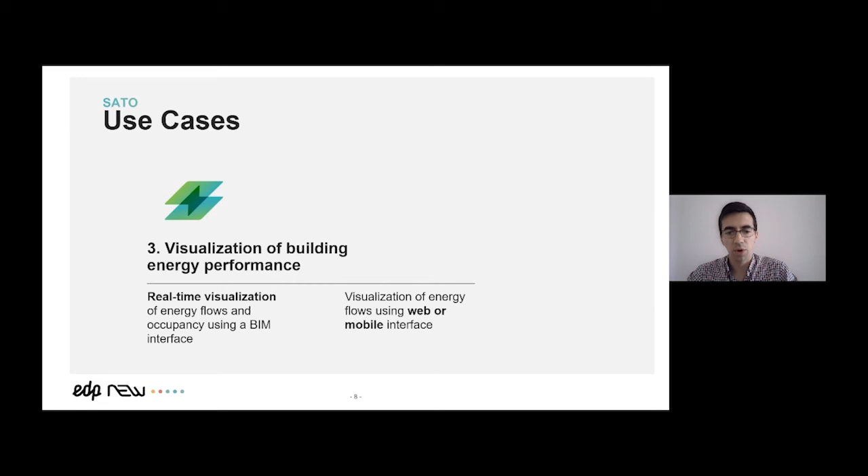Our fourth area is self-optimization. This is probably one of the most complex areas, along with self-assessment. This is where part of the brain of the system works and develops the strategies that will be implemented in the buildings. The main goal, as the name says, is to optimize the energy efficiency of the building, but we also want to improve indoor air quality and occupant comfort.

When we look into this area, we look into more specific and detailed strategies. Some examples can be providing flexibility services to the grid, which is not a short-term thing we can accomplish but a study we will make. We can also look into other strategies such as load shifting by controlling some loads that have flexibility, using natural ventilation, and using techniques of building as a battery.

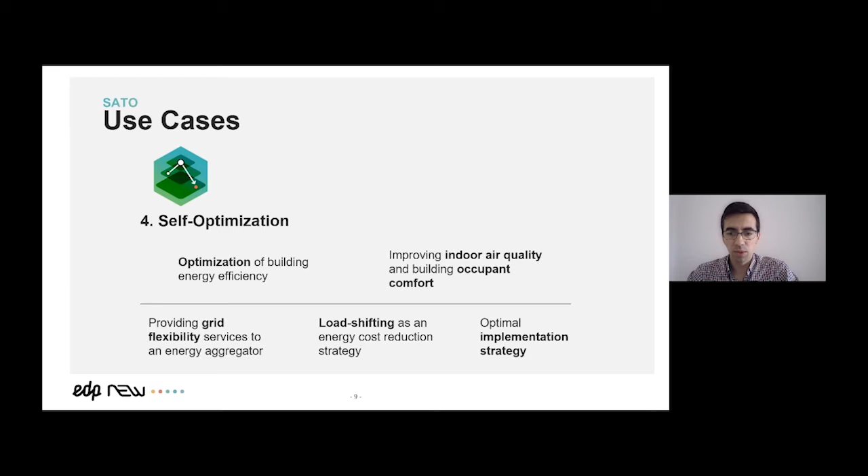At the end, all these defined techniques and strategies will merge onto a system that will evaluate them based on preset rules and decide what's the optimal strategy to implement. Finally, the last area in the project is controlling, which is just implementing the strategy that was decided previously in the buildings using the actuators.

Before finishing my presentation, I'd like to show you two more things. One is where we will test these features, and I'll just highlight the Seixal residential pilot, because it's the pilot that us, EDP, will be most active on. This is very important - we'll deploy ready systems in these pilots and test all these features.

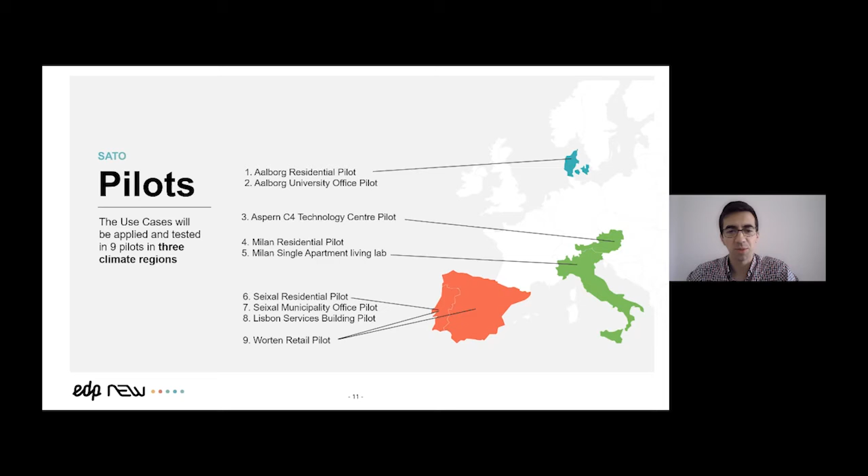Also, if you live in Seixal, I'll leave you the invitation to contact us, because we might be interested in working with you.

Finally, the last thing I want to share with you is just three points on what's in it for EDP, what we aim to achieve with this project. So obviously, we are co-developing this decision-making layer that can be applied over legacy monitoring systems. We aim that by the end of the project, we can develop new services that can be provided to residential and commercial customers regarding this intelligent and smart buildings area.

Also, we are gaining some knowledge on the indoor environmental quality and the parameters we need to assess and monitor to improve user comfort. Finally, I'll highlight the evaluation of the appliance flexibility potential. Like I said, this is more a feasibility study that will gather loads from the different buildings and see if in a future market there would be room to play with this flexibility.

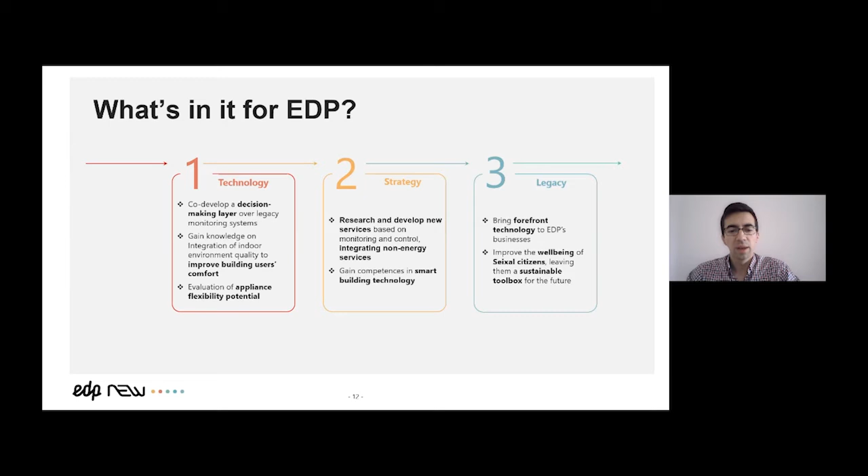Thank you, Flip. We'll now move on to another presentation from Pedro Ferreira, which will focus on machine learning for building energy assessments. This presentation will also touch a bit on the methods being applied to SATO, since Pedro is also working on this topic, as I mentioned previously. So the word to you, Pedro.

Pedro, we can't hear you. I was muted, I always forget. Is it okay now, can you hear? Yeah, okay now? Yeah. Because on my screen it still shows as I'm muted, as if I was muted. Anyway, if you can hear me, then it's fine. Do you see the screen, the first slide of the presentation? I shared the screen, I hope it shows well.

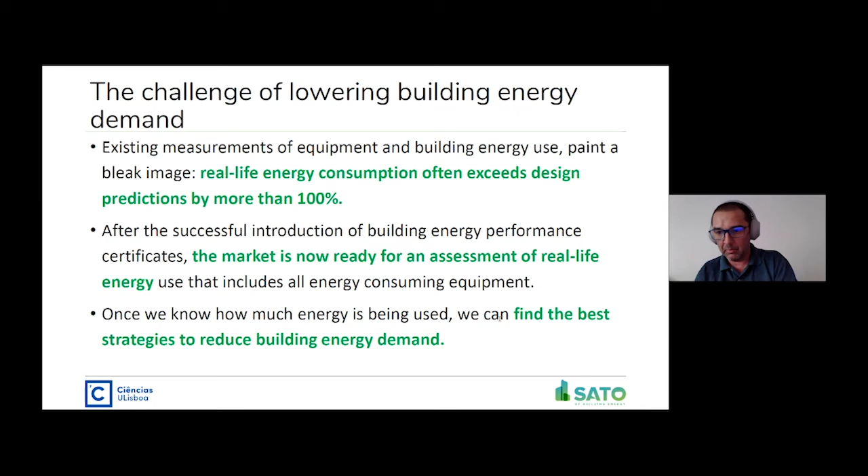So the goal in the project is to provide the means to assess energy and then optimize energy use - it's assess for optimization. Now, what is the potential of machine learning to achieve this objective, both in the assessment part as well as in the optimization part?

Where does this potential come from? Of course, the energy transition process brings digitalization to the energy sector. It also brought decentralization, both in terms of energy resources providers, business models, and data sources.

Importantly, it involved different users and stakeholders and connected them. This means that through this process, we now have an abundance of data related to energy and energy in buildings. And of course, we have new problems and higher complexity problems.

This is why machine learning can give an important contribution for the assessment and optimization of energy in buildings. Because we have different problems with all this decentralization, with the involvement of different users and stakeholders, and with important goals that the European Union has in this respect. And of course, these problems are more complex than they were in the past because of all the relations between them.

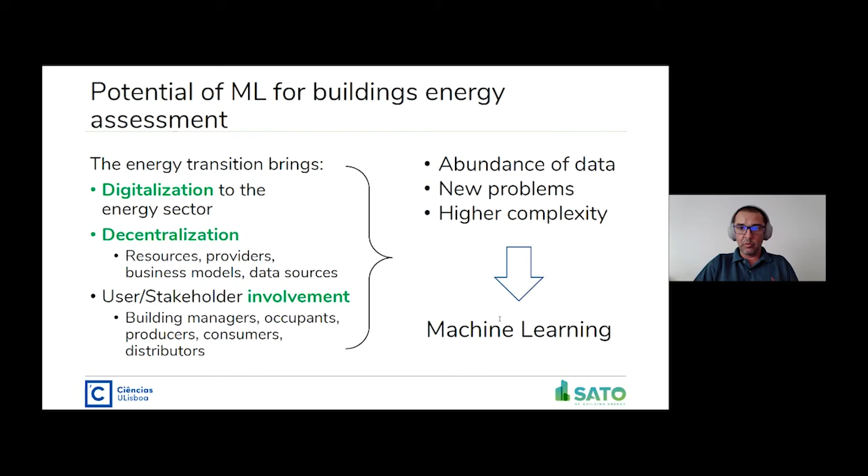We need just a small note, because machine learning is not alone in this process, and it's only possible to use it for this objective mainly because of two other components: the Internet of Things and cloud computing. Internet of Things brings us connectivity so that we can connect all the devices and equipment in the building, sensors, technical building equipment, everything that is consuming energy. Potentially, we can connect it to a network.

And then we can have data flowing from these devices to a cloud. That's where cloud computing comes in, because it can centralize data for a building zone, so we can structure our data in many different ways. And it has the potential to provide us algorithms as a service, so we have machine learning algorithms already streamlined in a way that is very easy to connect them to datasets and extract relevant information from them.

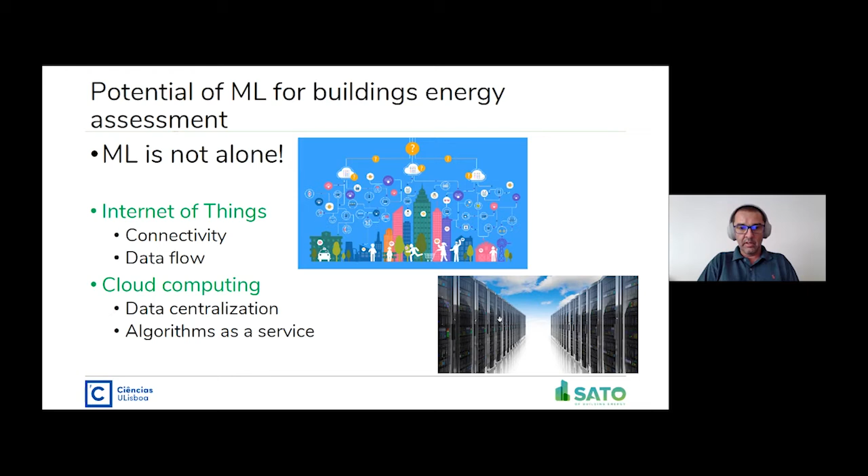And the way that we do this integration and build the systems that are going to assess and optimize the energy in buildings, we need to remember that we are building systems for humans. And the purpose of using machine learning in these systems is because we have so much data.

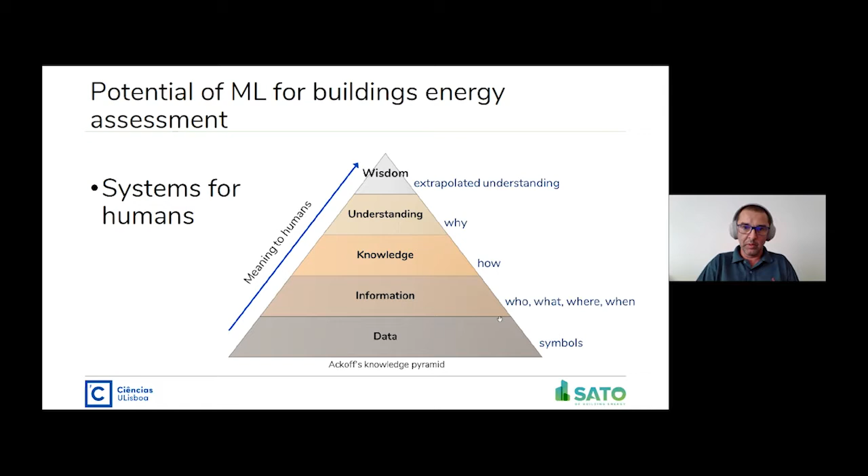So which kind of applications can machine learning have in the context of buildings? Well, it can be used for monitoring and assessing energy, both the consumption and load disaggregation, so that you can find out how the energy is being used by different consuming devices. It can be used for prediction, and prediction can be of consumption and of other factors affecting consumption, such as the weather, such as the occupancy of the building, all factors related to the way we consume energy.

You have to know that energy assessment is not just making or having measurements of energy consumption in devices in buildings and displaying these measurements. We need to go beyond that so that we can assess the performance of those devices and the performance of the buildings. And to do that, we need models, we need different processing capabilities.

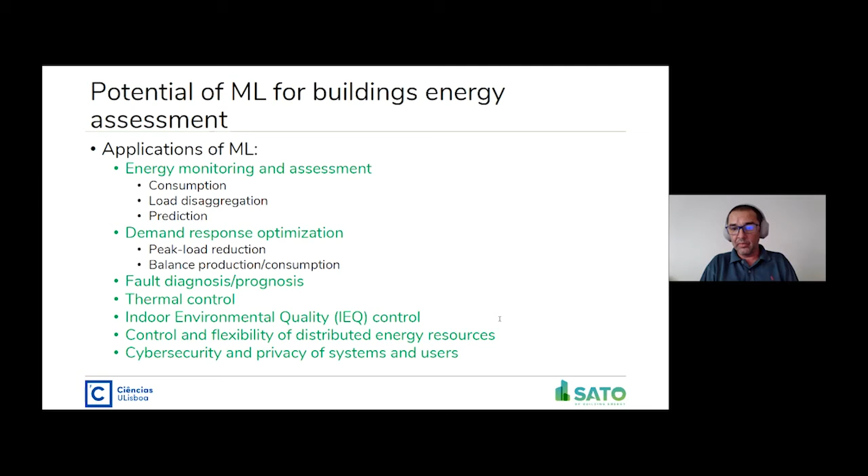But coming back to these applications, you have demand response optimization, fault diagnosis, thermal control or thermal comfort control, indoor environmental quality control. It can also include thermal control there, also with air quality and lighting control, which are three domains, at least these three of IEQ. Control and flexibility of distributed energy resources, and of course, importantly, because this involves the occupants, the owners, the users of the buildings, we need to have cybersecurity and privacy, and machine learning here also has important roles to fulfill.

What is the general approach that we have for machine learning based buildings energy assessment? Well, first let's define self-assessment, which is the concept that we use in the project. We define it as the capability of a building energy system or equipment to self-diagnose their energy performance.

So what we build is we have the device and we have data measured from the device and the environment in which the device is operating. And we create a virtual device in the cloud that becomes the self of that device, and it can assess itself and optimize itself. This is the principle behind our project.

So we envision machine learning based self-assessment of buildings energy performance, and we see it operating in two ways, related to how we use data. We can use it in a passive way, or use it in an active way of generating data for the assessment.

Passive usage of data is just having lots of sensors and devices that use energy transmitting information to the cloud. Data is continuously generated, stored, and processed, analyzed. We also have a definition of what to expect from those devices and buildings—benchmarks, performance thresholds to compare our assessments to, so we can find out if the performance is good or bad. We need these references. This is the first two points in the passive usage of data.

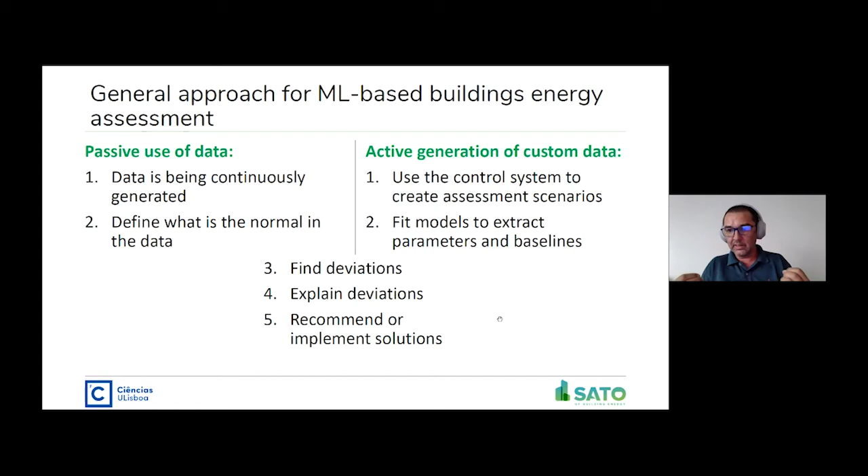Whether it comes from the passive way, just measuring and analyzing, or from data we actively generated using the building and its devices, we then try to find deviations and explain these deviations in the performance of the equipment or building. This path from data to explanations and finding deviations is the main role of machine learning here, because you have too much data and you have to summarize it into useful information so that automated systems or humans can make informed, high quality decisions on how to manage the energy in the building.

In these self-assessments, we are going to project and analyze them at different scales: space, time, occupancy of the building, and also autonomy. Autonomy is the way we assess how management services operate—are they fully automated or completely manual? We can project the assessments on all these scales.

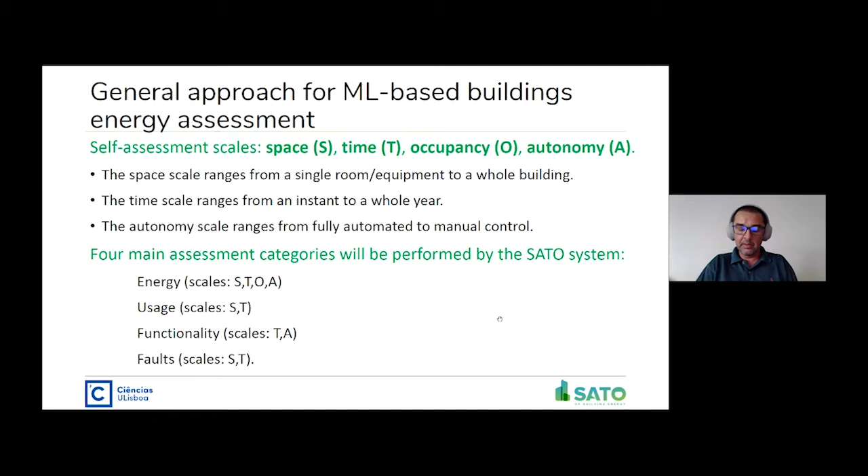There are four main assessment categories that we are going to perform in the project: energy related assessments, usage related assessments related to the way we use energy, functionality assessments, and fault assessment in the equipment that we have there.

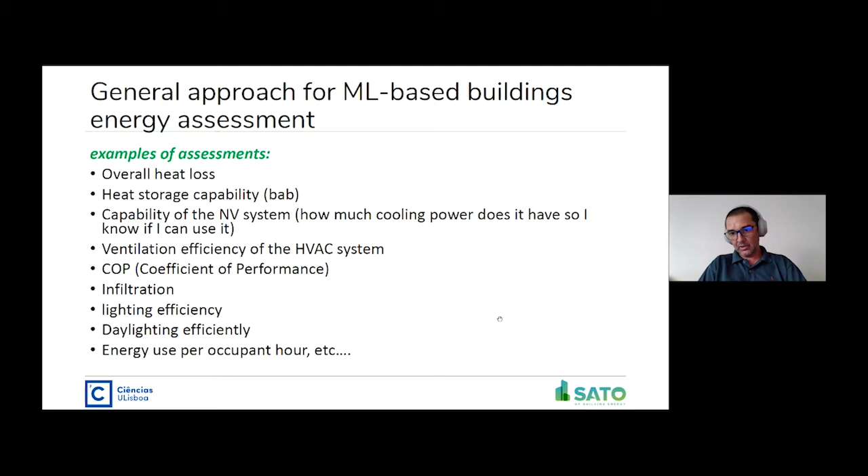This is a list of examples of assessments that we can do on the building. I'm not going to go through all of them. Maybe people in the energy field already recognize some here, but there are many other assessments we can do, provided we have the right data for that.

I think I'm going to finish now with just two or three more slides, just to talk a bit about the main types of problems and the challenges that machine learning-based buildings energy assessment face. So, what are the main problems in this context?

Well, they can be categorized into modeling and simulation problems, control problems, or optimization problems. For modeling and simulation, we use machine learning techniques to perform system simulation, to make predictive models for weather, consumption, occupancy of the building—different kinds of models that generate predictions of performance indicators or forecasts of quantities over time. Classification is also an important technique we use here.

These can also be used for control, and the model predictive approach is central, considered the most effective way to use data and assessments to find an optimal way to manage different devices in the building. And of course, optimization—machine learning based optimization methods can take complex problems with high dimensional data. These are usually called meta-heuristics, because they can handle problems that classical optimization methods would struggle to solve.

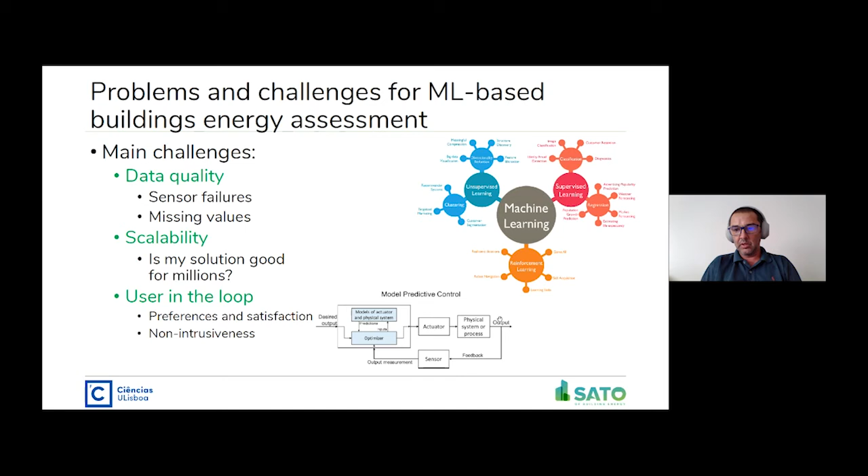Main challenges, and this is an important point—I think this is not the last slide, but the previous one. I'm not sure if I'm taking too much time already. It would be good to conclude, Pedro. All right, so I will.

People usually have high hopes for artificial intelligence and machine learning, but they forget it's very difficult to make these systems operate correctly in practice. Why? Because it's difficult to maintain data quality and data dependability, related to data availability, reliability, integrity and so on. It's common to have sensor failures and missing values, and we need methods that operate well when these problems occur, and that's not common.

In academia, we have data that is very well curated, well processed and stored, and we build very good methods that operate well on that data. But commonly in a real scenario this will not be the case, and we have to be able to cope with sensor failures, device failures, missing values and so on.

Then there is scalability. Is my method, my solution, good to be scaled to millions or many thousands? Is it scalable? If it's not scalable, then there's no point in developing it.

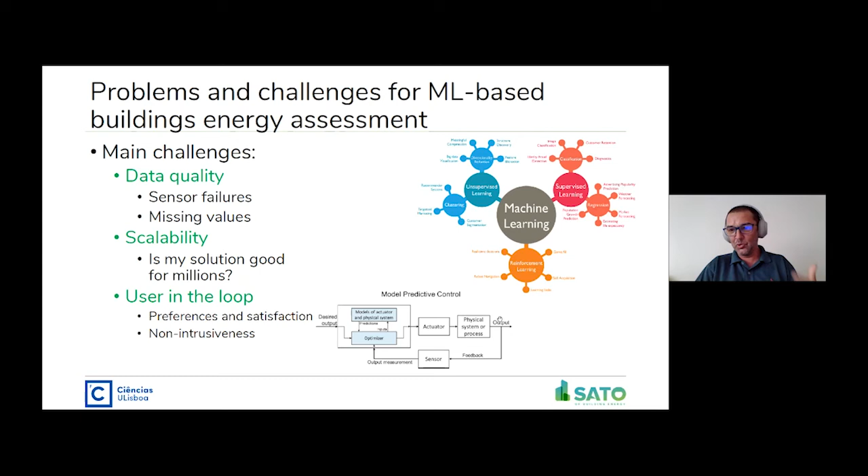And then there is the user. The user has the potential to mess up things a lot if your system is not well designed. The difficulties have to do with how to catch the preferences of the users and how to maintain their satisfaction with the operation of the system. This second part is a real challenge. And of course we need systems that are non-intrusive. We don't want to be nudging the users all the time, bothering them all the time. It needs to be done with parsimony.

I think this is, for me, the big challenge that we have: how can I use machine learning, statistical learning, artificial intelligence, call it whatever you want? The problem is that all these different systems exist in buildings. You want to manage demand response, flexibility, indoor environmental quality, thermal comfort, lighting, air quality. You might need to ventilate. You want good energy efficiency. You want electrical vehicles also using energy. You have PV production in your building. How do you manage all this? Because some of these objectives, looking at each one individually, might be conflicting with each other at a certain point in time. Then how do you optimize and manage these systems?

I just want to give an example of artificial intelligence agents based on a technique called reinforcement learning and deep learning models, artificial neural networks, used to develop agents that just by looking at the pixels of the screen of classical arcade games—very complex games, very difficult to win—managed to win and beat the records of these games after some time, after learning. These are very complex problems. So if this can be done in this area, I'm sure we can also use these techniques, or similar ones, to provide an acceptable machine learning based system that can manage the energy resources of a building in a holistic way that satisfies the requirements of the involved stakeholders.

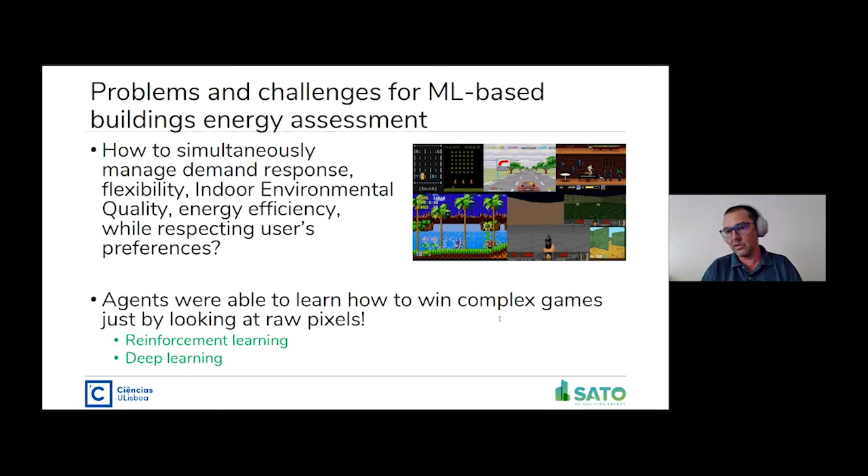And that's it, thank you for listening. I will be happy to take your questions as soon as the time comes. Thank you very much, thank you Pedro.

It was a nice explanation of how building self-assessment and energy assessment is important. Now we'll move to Manuel Casquiço and the presentation about public administration retrofit plans and the current reality in Portugal.

Because I have the sound. No, it's okay, no it's not. Okay. Is it okay now? Yeah, now it's perfect. Sorry for this.

Thank you very much. I'd like to thank EDP New for the invitation for us, for ADENE, to be here and talk about some projects on public administration buildings. I will talk about three different Simplex measures that we are implementing at ADENE. Simplex is a wider program of simplifying processes in public administration in Portugal, and we have funding support for implementing these schemes. The first project is the ECO.AP process, part of the wider program of energy efficiency resources in public administration.

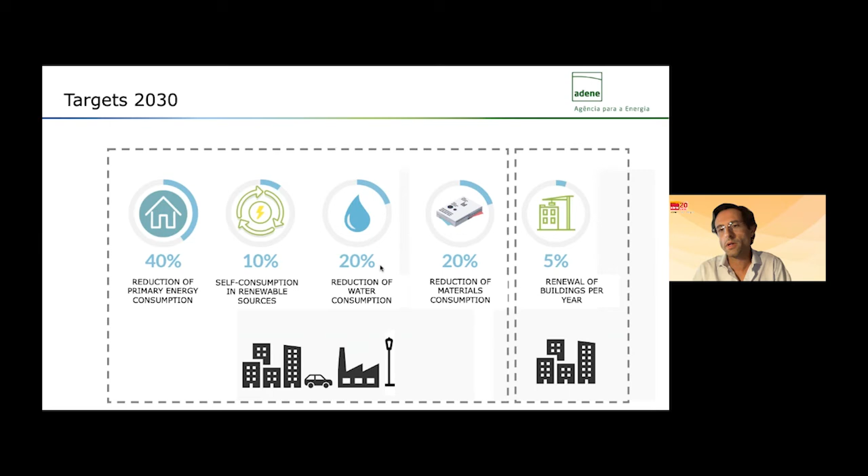So the importance of this program is that it brings targets for the public entities. We have here 5 different targets for public entities: 40% reduction of primary energy consumption, 10% self-consumption in renewable sources, 20% reduction of water consumption, 20% reduction of materials consumption, and finally, a rate for refurbishment for public buildings. So it's very important, and these are the targets that all the entities must have when they are making their plans. I will explain later how.

So this is some numbers just for you to know the universe that we are talking about. In Portugal, we have 19 governmental areas. Each area has an energy and resource coordinator that is our focal point for the ECO.AP program. We talk to them and we send them reports about this program for them to check how the evolution is going in the governmental area.

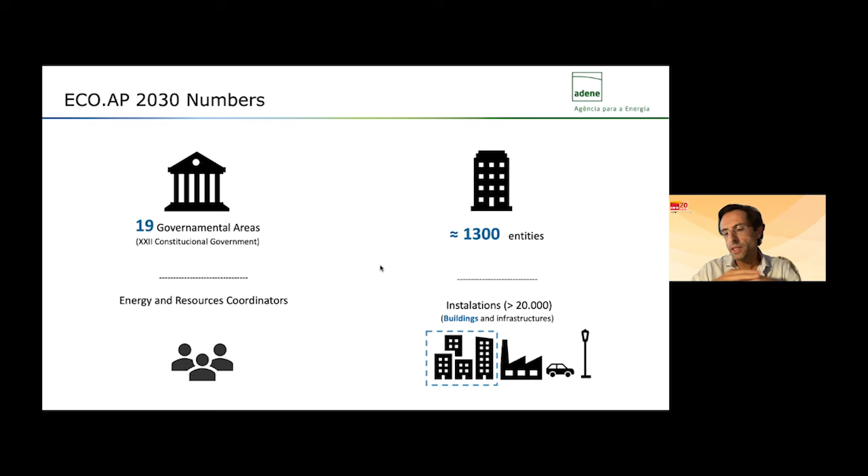We have more than 1,300 entities. This is the approximate number, and we are talking about 20,000 buildings and infrastructures of the different types of governmental areas, defense, education. So it's a wider program that brings together different types of buildings, and that is one of the challenges of the program. So we have here several activities that we are doing at our department.

So the first one is the barometer ECO.AP. It's an online tool that each entity has access to, to control all aspects of their buildings, and they can go there to check electricity, natural gas, and all the information, and they can control all data there.

So the other one is the ECO.AP web. It's a one-stop shop that we are doing for public administration. The first one, the barometer, is already in force. The second one, the web ECO.AP, we are developing at this moment.

Another important aspect is the efficiency plans, as I said before. Each entity must develop an efficiency plan until the end of this year. So we are helping these entities, all the public entities, more than 1,000 entities, to try to develop their efficiency plans that will help them support the financial scheme of the ECO.AP program. So we are hoping that in the next 2 months, I think this month, we are going to have a financing scheme with the European funds to implement the energy efficiency measures for the public administration. It's a specific scheme for the public administration, and ECO.AP is an important part because we are giving support to these entities.

Another activity that we are doing is training activities. During the year, we have several training activities that we are doing to support all these entities. We are also making dissemination because we want to be a good example, a role model for service buildings, for public buildings. You can check our LinkedIn account.

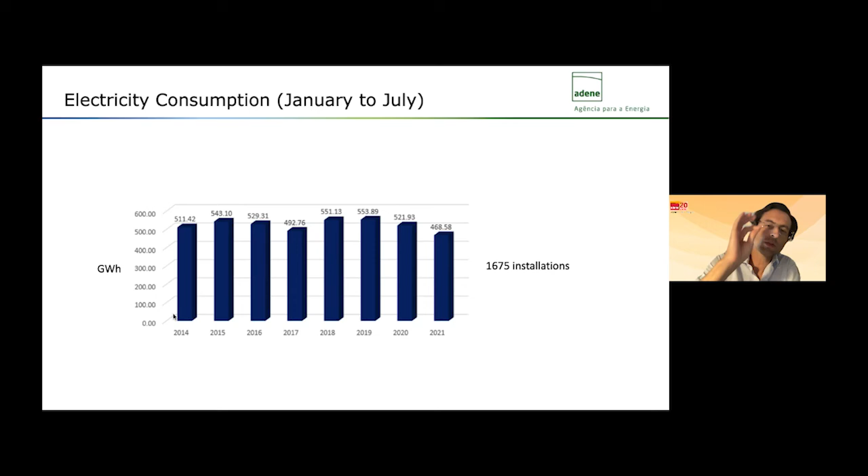So we can see what is increasing, what is the variation, and we can see what is the problem and why this happens. We have a project we are working on specifically to see what the problem is, what happened, and to send a trigger, an information to our contact point in the entity, to see if the information is correct or not.

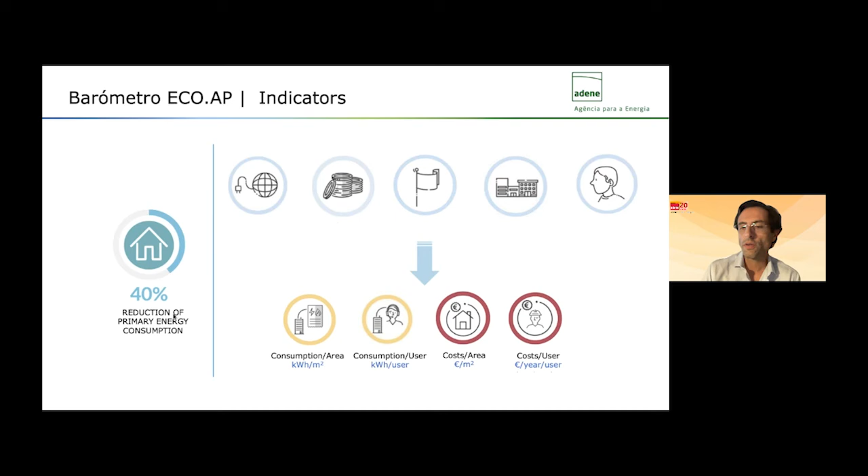Other indicators we have help to see if different targets are being fulfilled, for example consumption per area, per user, and other costs. This information we also have in our platform, and we send a report each year.

For each of the coordinators of each governmental area to see how the evolution is going. Another important information for us to cross data is regarding the building energy certification system. As you can see here, it's the current energy rate, for public buildings, central public buildings. We have the rates, the new energy rates after the implementation of energy efficiency measures, and you can see the different types of measures with a focus on lighting, because it's one of the easiest measures to implement.

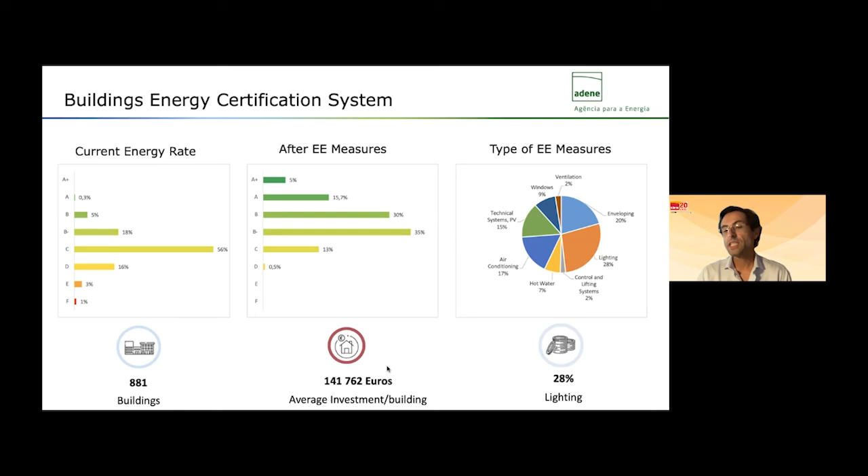And here you have the average investment per building, for you to have an idea of the amount of investment predicted for this kind of buildings.

One of the other projects I already mentioned is the Aqua Monitor, which is going to be inserted in the barometer. It's specifically for water saving. For different types of entities and buildings, we are going to control water consumption. We already have a pilot that shows us we can have potential savings up to 35%. So this is a very important project for us.

These are different types of models we are developing, using artificial intelligence and machine learning. This is for different phases - the professor before already talked about some important phases of artificial intelligence, but this is just to give you an idea.

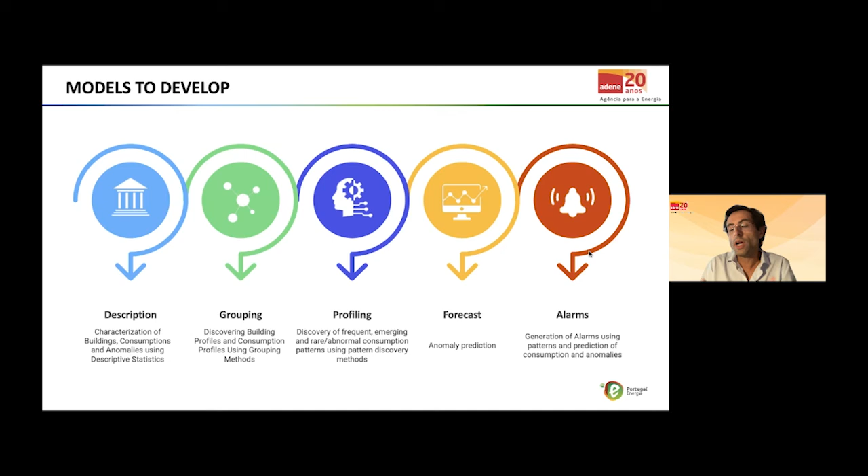The great objective in the end is to have an alarm that will help local energy managers see how the building is going, what the variations are, and to help them implement measures to reduce water consumption.

The other two projects we are working on - I will not talk about energy poverty, though it's also an important project we have - are the projects related to data science, specifically energy consumption.

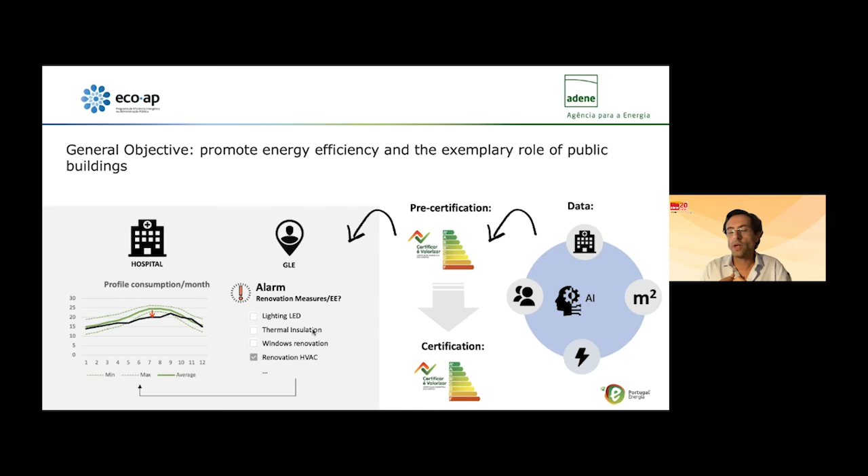The first is specifically for ECO.AP, just to have an alarm based on the profile consumption each month for each building. The idea is with machine learning and artificial intelligence to see variations in the profile, and then to see what kind of measures will be or have been implemented in the buildings, to check variations and send alarms and reports for the managers and for us, the coordinators of the different governmental areas, to see what is being implemented.

Another aspect, and finally the last slide, is Poupa Energia. This is important because it's related to the open market of electricity. We are now helping entities understand what is the best tariff for them and also see the costs of the electricity bill. It's another project we are developing, not only based on the fixed tariff, but also the indexed tariff in the market.

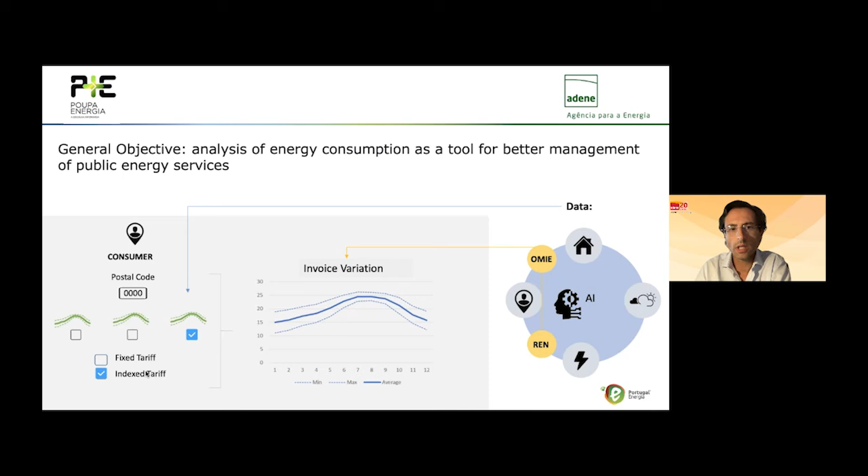The idea is to evaluate and propose different tariffs and help public entities promote energy efficiency, to reduce costs in the end. Basically, this is the project. So this is my presentation. Of course, if you have questions, I will gladly answer them. Thank you very much.

Thank you, Manuel. We'll now move to the Q&A session. We already have some questions in the chat, so we'll move to these questions. The first one I think is directed to Philippe - now the chat is loading, not cooperating. Okay, I have access to it. It says the platform is really interesting, but how do you tackle integration with existing equipment, and how are you planning to accelerate adoption of your platform to customers with existing equipment? I think this is a really interesting question, and to complement, how are you looking for a possible business proposal for this, and will it take into account any initiatives for adoption?

Thank you, João. Yeah, let's try to break down the question. So regarding the first part on the integration of different equipment.

Basically, the platform, as I told during the presentation, is an interoperable platform. This means we aim to collect data from several systems, but if you have proprietary systems, such as KNX systems which are usually proprietary, this will be harder to integrate. We need open source or certain types of systems that allow us to do this integration, or at least an API or some method of doing this. But there are some limitations to it, of course.